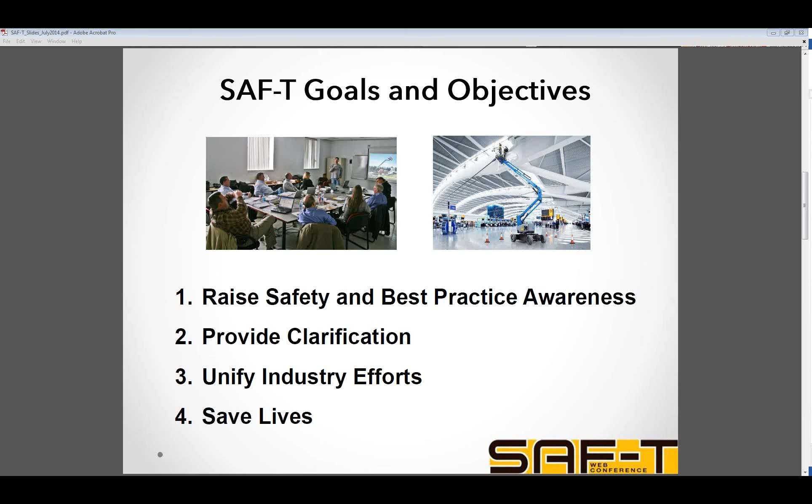Today's presenter is Scott Owyen, who will be discussing the top 10 safety tips for operating aerial work platforms. Scott Owyen joined Genie in 1983 and has held key positions in manufacturing, training, product management, and outside sales. Today, Scott serves as the Global Training Manager and focuses primarily on aerial work platform and telehandler operator safety training and product training. Scott was also instrumental in the development of the Genie Lift Pro online operator training program, which added online telehandler training to its product suite this week.

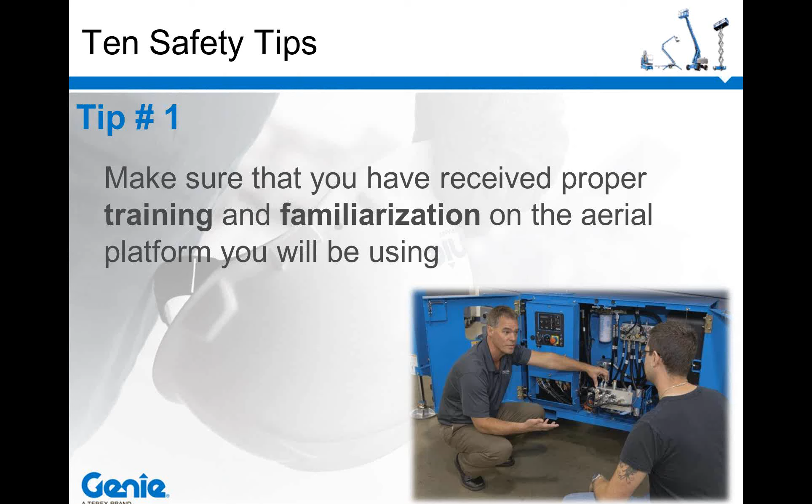The American National Standards Institute, or ANSI, is a standards writing body for aerial work platforms in the United States. ANSI has developed strictly defined training requirements for aerial work platforms. These requirements are outlined in their A92 Manual of Responsibilities that is sent with every machine shipped in the United States and Canada. ANSI requires two components of training: general training, which is typically done in a classroom or online and includes an overview of the responsibilities of all parties associated with the operation of aerial work platforms, standards and regulations, hazard recognition and avoidance, pre-operation inspections, function tests, workplace inspections, record keeping, and safe machine operation, among other topics.

And hands-on practical training, which includes locating the storage compartment for the operator's manual and the ANSI manual of responsibilities, reviewing the operator's manual and safety signs on the machine, performing a pre-operation inspection and function tests on the machine, demonstrating an understanding of the function and purpose of all safety devices, performing a workplace risk assessment, and finally, operating the machine for a sufficient period of time to demonstrate proficiency on the machine. Once you've been trained and qualified on a machine, you may be required to become familiar with and operate a different type of aerial work platform.

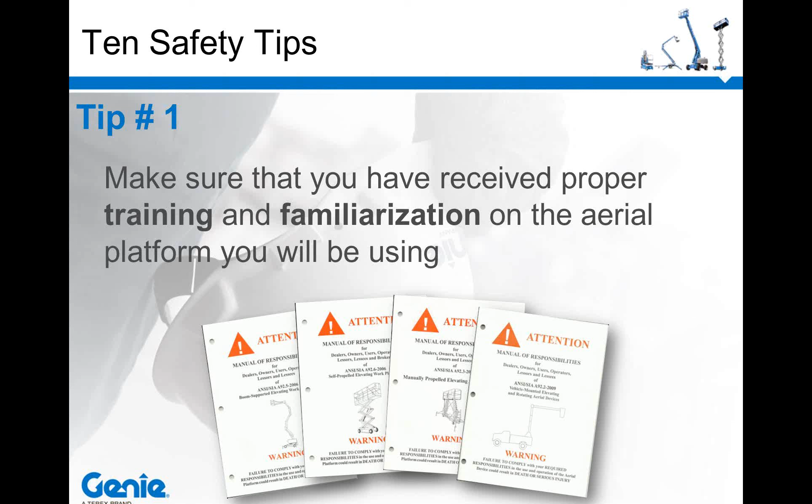Here's where it gets interesting. Although ANSI standards are voluntary, OSHA often adopts ANSI standards via incorporation by reference. When these standards are adopted or incorporated, they become part of the OSHA regulation, and therefore compliance is mandatory. Even when they are not incorporated into OSHA regulations, employers are expected to acknowledge them since they represent a consensus on what experts consider safe.

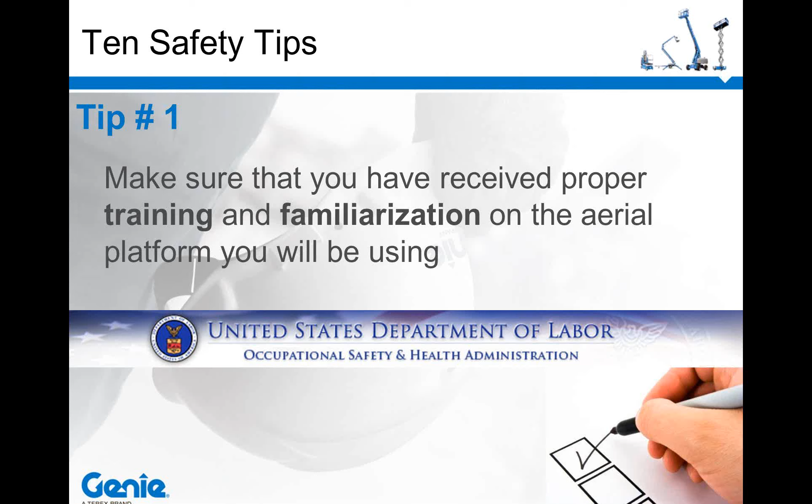Also, not following standards may be considered a violation of OSHA's General Duty Clause, which requires employers to keep the workplace free from recognized hazards. Finally, since ANSI standards are considered best practices, they are viewed as the legal standard of care. Noncompliance can equate to negligence and legal liability in the event of an injury. It's also important to note that you as an operator are personally liable for your actions when operating an aerial work platform. So there are many good reasons to ensure that you are properly trained.

Of course, the most important reason to make sure that you have received proper training and familiarization is to ensure that you have the knowledge and skills needed to operate the aerial work platform safely and efficiently. So please make sure that you have received proper training, both general training and hands-on practical training, as well as familiarization on the specific model of aerial work platform you will be using. Always thoroughly read the operator's manual before beginning operation. It contains all the safety information and operating instructions you will need to operate the machine safely and efficiently.

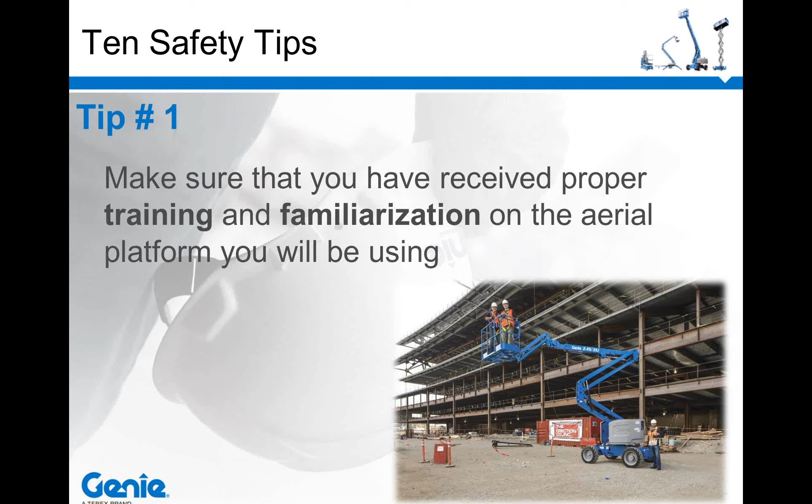Safety tip number 2. Since each job site may have additional requirements, it's important to always read, understand, and obey an employer's safety rules and worksite regulations, as well as all applicable local, governmental, and provincial regulations that apply to aerial work platform operation before operating the machine. Remember, the safe operation of any aerial work platform is up to you. It is your responsibility as an operator to inform your employer if there is even one thing that will keep you from safely doing your job.

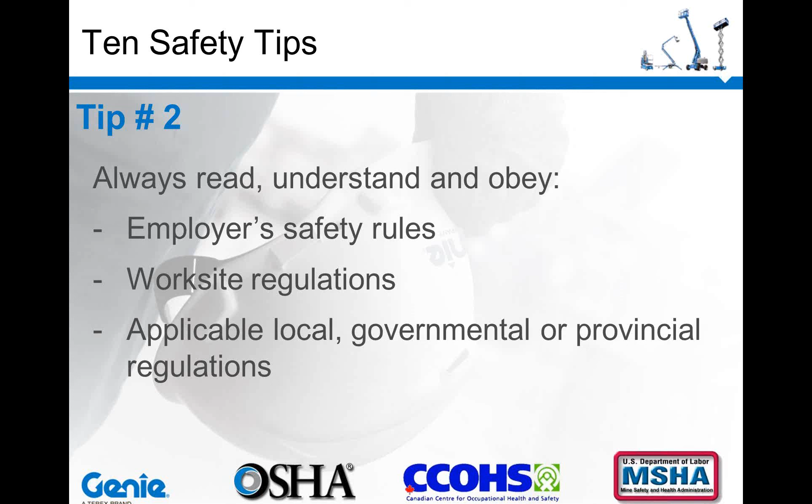Safety tip number 3. Always perform a pre-operation inspection and comprehensive function tests on the aerial work platform before each shift. The pre-operation inspection is a visual inspection performed by the operator prior to each work shift. This is important because very often you don't know where that machine has been or how it's been maintained. The inspection is designed to keep the operator out of harm's way by discovering if anything is apparently wrong with the machine before the operator performs the function tests.

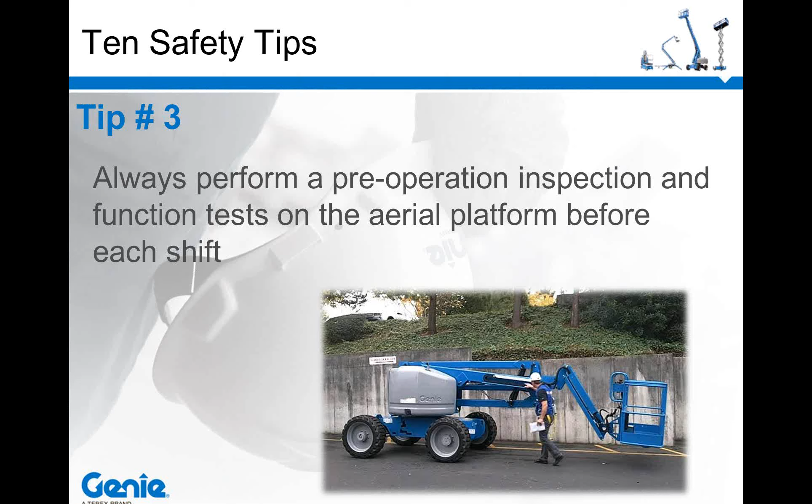The pre-operation inspection also serves to determine if routine maintenance procedures are required. Only routine maintenance items specified in the operator's manual may be performed by the operator, and only if they're authorized to do so by their employer. The operator's manual contains information about how to perform this inspection. You will need to check for unauthorized modifications, damage, or loose or missing parts.

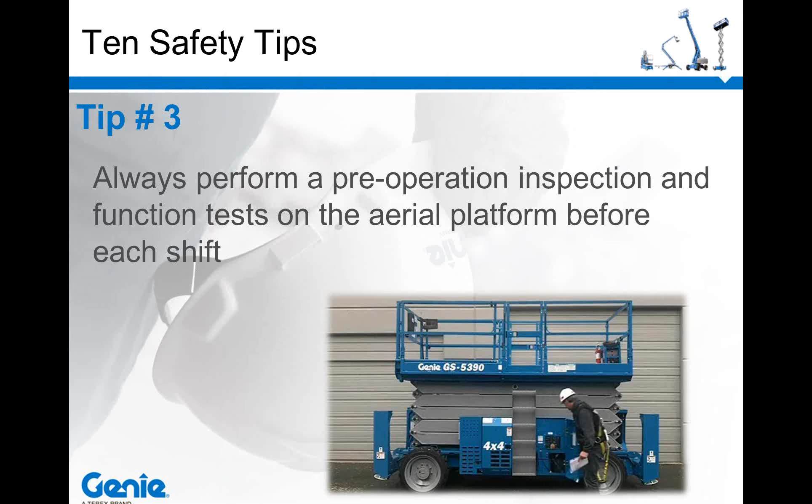If damage or any unauthorized variation from factory delivered condition is discovered, the aerial platform must be tagged and removed from service until it can be repaired by a qualified service technician according to the manufacturer's specifications. After repairs are completed, the operator must perform a pre-operation inspection again before going on to the function tests. Scheduled maintenance inspections should be performed by qualified service technicians according to the manufacturer's specifications and the requirements listed in the responsibilities manual. If the machine does check out, you're ready to move on to the function tests.

The function tests are designed to discover any malfunctions before the aerial platform is put into service and to verify that the machine is operating properly. A level sensor, alarm, or any other safety device can't do its job if it has been disabled or if it has malfunctioned. Before you begin testing functions, select an area that is firm, level, and free of ground and overhead obstructions. You must follow the step-by-step instructions in the operator's manual to test all functions, as well as the safety devices on the machine.

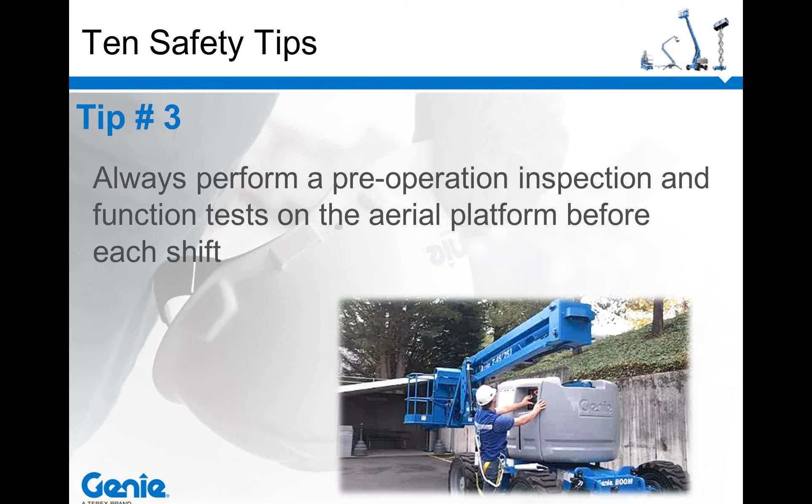A malfunctioning aerial platform must never be used. If malfunctions are discovered, the aerial platform must be tagged and removed from service until it can be repaired by a qualified service technician. After repairs are completed, you must perform a pre-operation inspection and function tests again before putting the machine back into service.

Safety tip number 4. Always perform a workplace risk assessment prior to moving the aerial work platform to the job site. The workplace inspection helps you determine if the workplace is suitable for safe machine operation. A properly performed workplace inspection identifies potential hazards associated with the work to be performed, assesses the level of risk involved, and defines the methods to control the potential hazards and reduce the risk. It also involves using the most appropriate aerial work platform for the work to be completed.

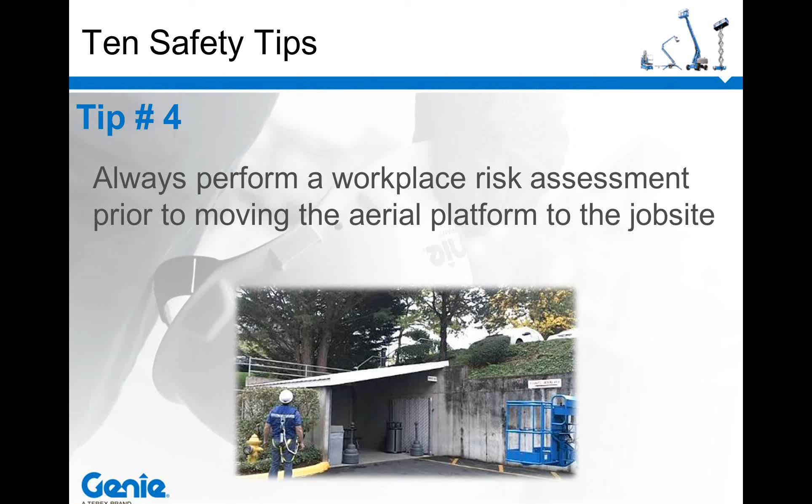When performing the workplace inspection, you should walk the job site, preferably in the path that the aerial work platform will travel. You will need to look for drop-offs and holes, floor obstructions, slopes, unstable or slippery surfaces, overhead obstacles, power lines, bad weather conditions, the presence of unauthorized personnel, and any other hazards that may exist. Then you must consciously think about and avoid those hazards through all phases of machine movement, setup, and operation. Don't take any chances. If you discover any situation that poses a hazard, it is your responsibility to stop work and report it to your employer.

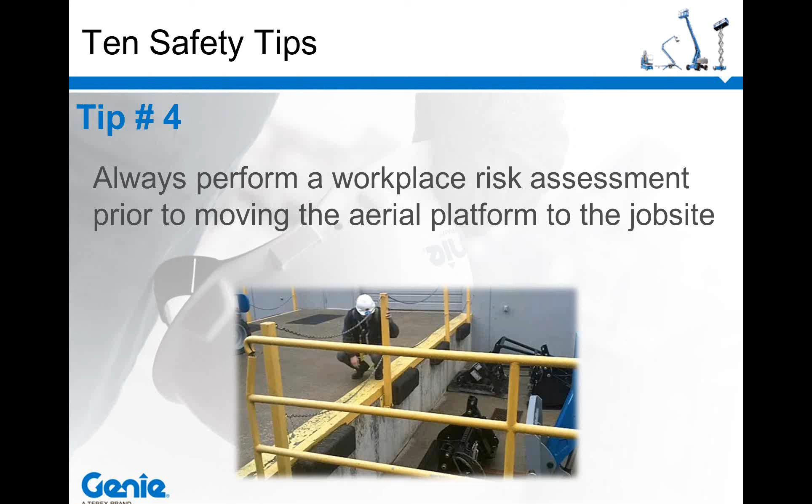A list of hazards you need to be aware of can be found in the operator's manual for the machine that you are operating. There may be others, so you must be alert and use your best judgment and experience to take the necessary precautions to avoid these hazards and any others that may exist. You must constantly assess the job variables and avoid exceeding the machine's or your own capabilities for the terrain and job site conditions.

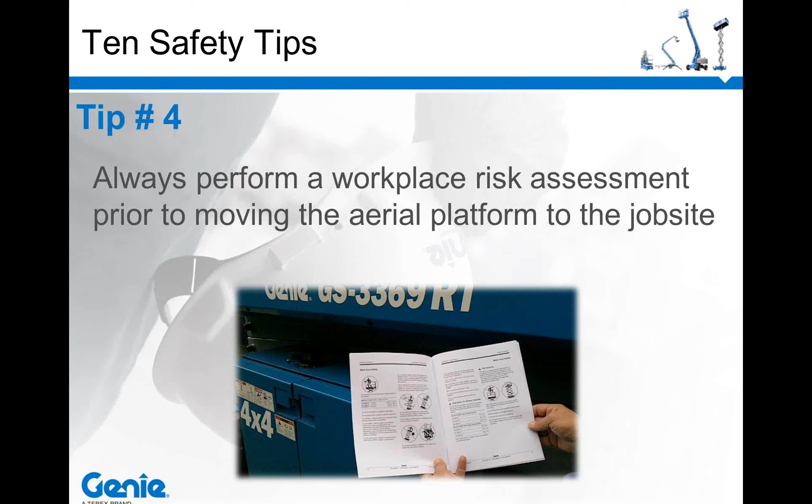Safety tip number 5. Always wear the proper personal fall protection when operating or occupying either a telescopic or articulating boom. A properly fitted full-body harness and appropriate lanyard or self-retracting lifeline are required by Genie as well as national standards and regulations. The purpose of the harness and lanyard is to protect an operator or passenger from falling to a lower level if ejected from the platform while traveling or if the machine is struck by another vehicle or object. Wearing the proper personal fall protection may reduce the chances of a fall resulting in serious injury or even death.

All personal fall protection equipment, or PFPE, must comply with applicable governmental regulations and must be inspected and used in accordance with PFPE manufacturer's instructions. Never operate a boom without this equipment.

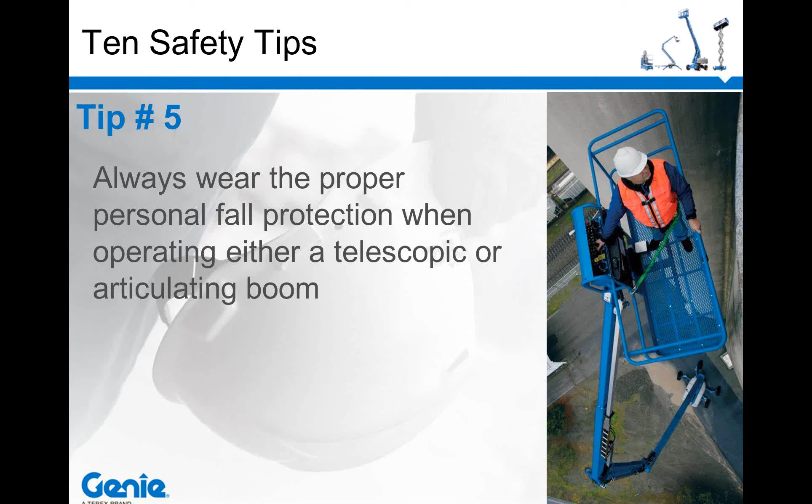Safety tip number 6, and this is actually one of the most important steps in this whole set of slides. Never sit, stand, or climb on the platform guardrails for any reason. According to the International Powered Access Federation Accident Database, of the 53 reported fatalities involving aerial work platforms in 2013, 13 were caused by falling from the platform.

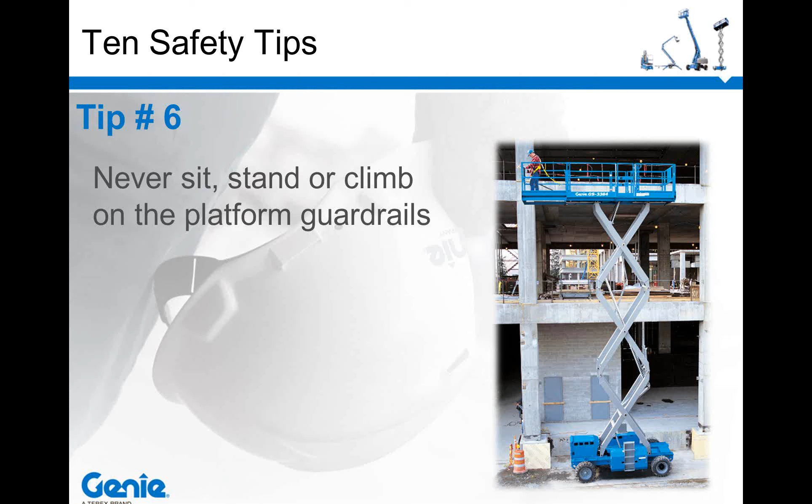The guardrails on an aerial work platform provide fall protection only if the operator maintains a firm footing on the platform floor at all times. Never place ladders, scaffolding, or any other elevating structure inside or against the platform. If an operator is required to reach an overhead work area that is too small for the platform guardrails to allow access to, the use of a manufacturer-approved device that has been specifically designed to provide additional access to confined spaces is recommended.

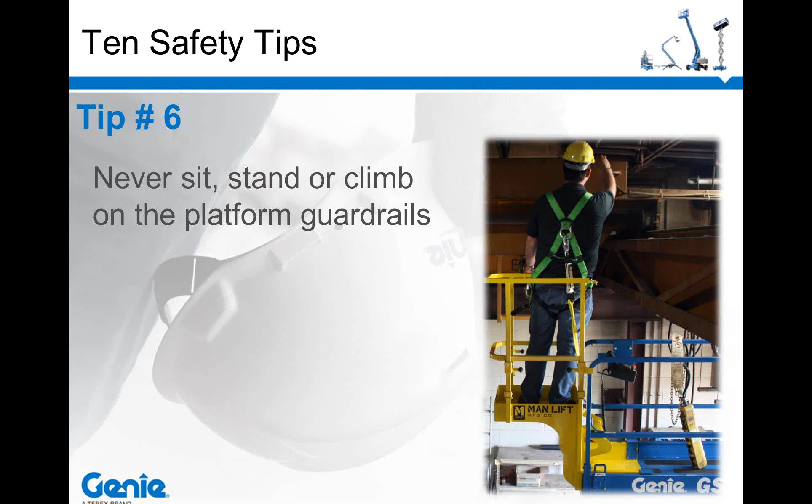Safety tip number 7. Never exit an elevated boom or scissor platform unless you've been properly trained to do so, maintain 100% tie-off at all times, and are in possession of and follow all of the instructions provided in an approval letter from the manufacturer that provides the proper guidance. Always contact the manufacturer of the aerial work platform you are using for additional information on exiting an aerial platform.

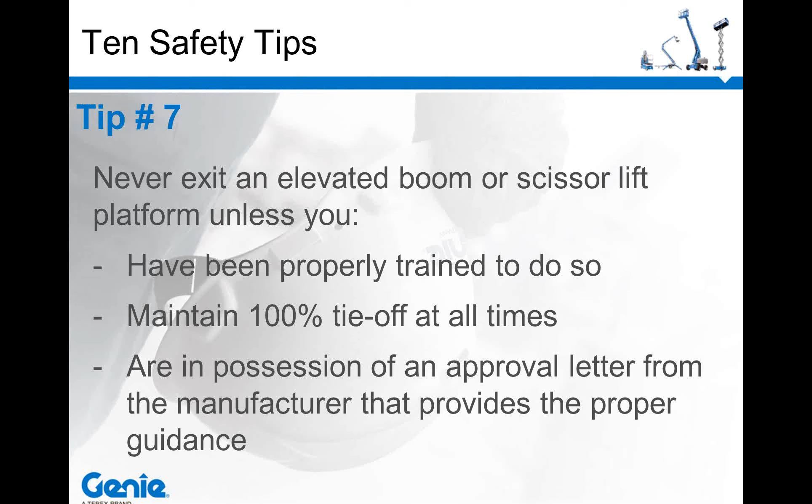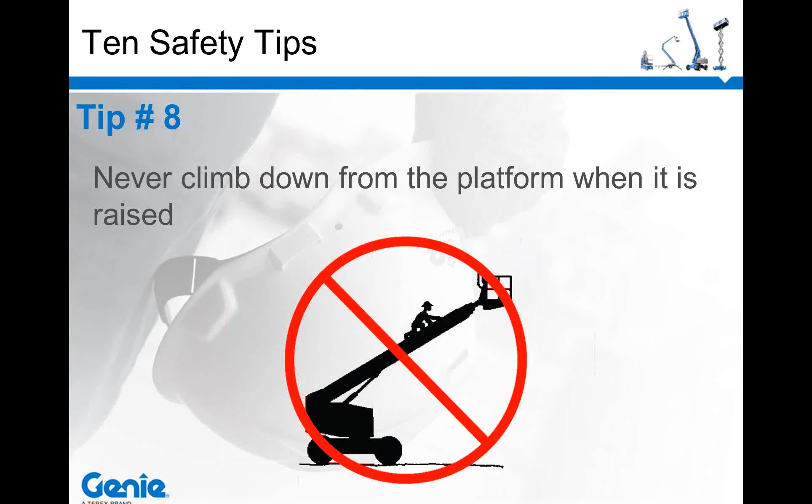Safety tip number 8. Never climb down from the platform when it is raised. Whenever possible, keep a cell phone or a two-way radio with you while you are in the platform. Always have a rescue plan in place. Rescue plans should, at a minimum, include steps to ensure that other personnel are aware that you are operating the aerial work platform and that they have been trained and familiarized to operate the machine from the ground controls, including the use of the ground control override function if equipped.

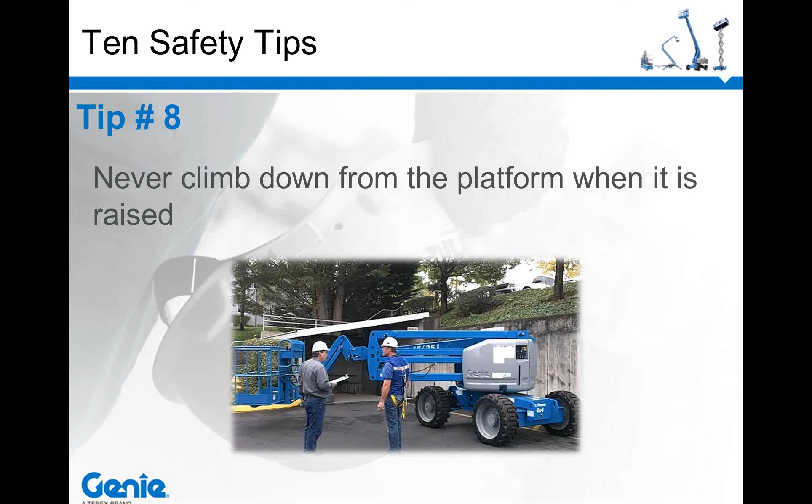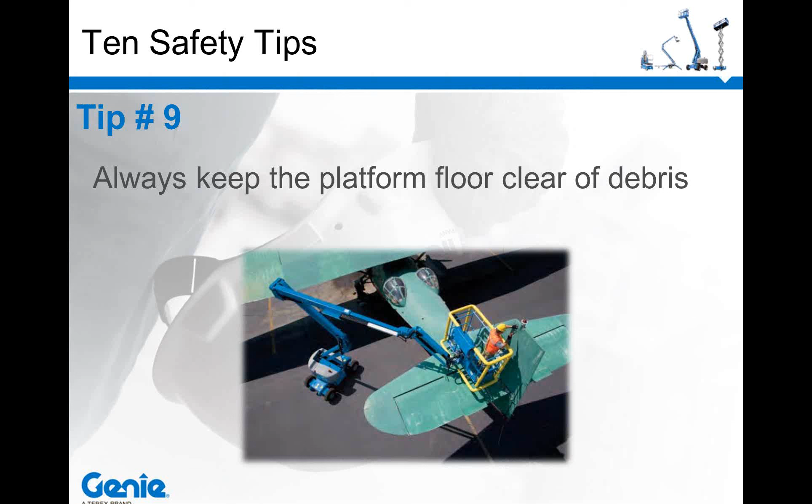Safety tip number 9. Always keep the platform floor clear of debris. Scrap materials, buckets, large toolboxes, and other items can cause a serious tripping hazard. You should remove any item from the platform that is not absolutely necessary to do your work. Utilize special manufacturer-approved attachments, such as fluorescent tube caddies, pipe cradles, or panel cradles, whenever possible to lift large or bulky items. Only use attachments that have been approved by the aerial work platform manufacturer for the specific machine you are using.

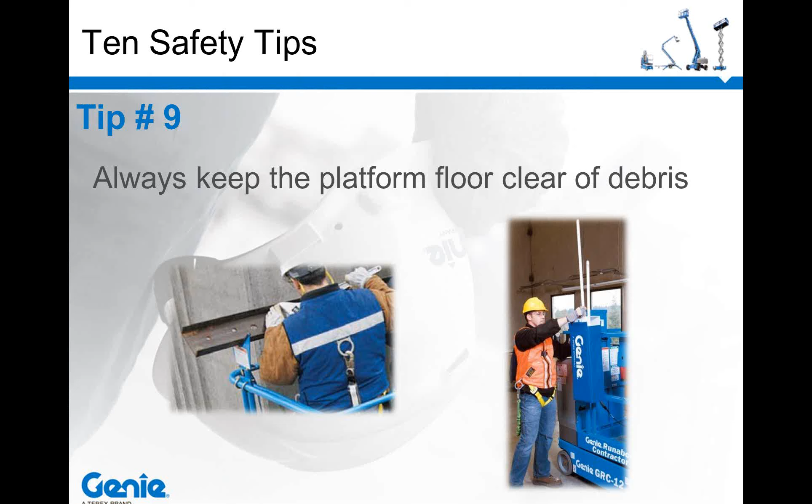And finally, safety tip number 10. Always lower the platform entry mid-rail or close the entry gate before operating the aerial work platform. The entry mid-rail or gate is an integral part of the platform guardrail and plays a critical role in fall protection. Never tape or prop the entry open, and never use an aerial work platform if the gate does not properly latch.

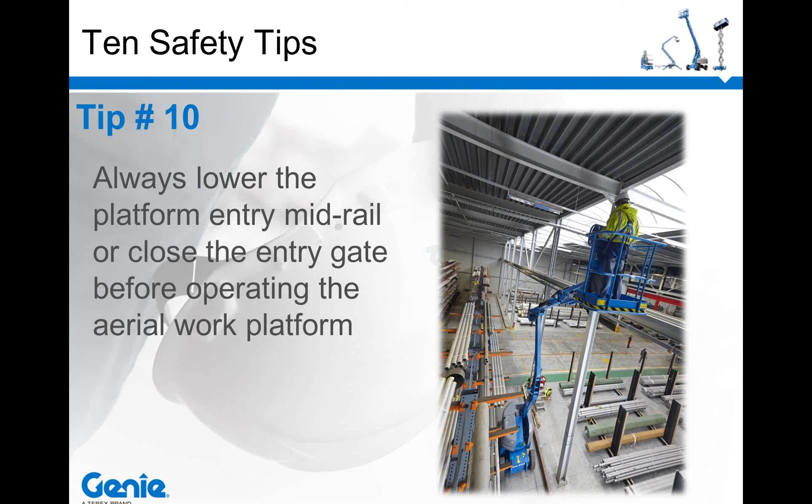The operation of any aerial work platform is subject to certain hazards that can be protected against only by the exercise of intelligence, care, and common sense, and not by mechanical means. It is essential that the operation, maintenance, and service of aerial work platforms is performed only by competent, careful people trained in the intended use, safe operation, maintenance, and service of this type of equipment. Remember, if you don't follow all safety instructions and safe operating procedures, serious injury or even death could occur. So please, always follow the instructions that the manufacturers have set out for both safety rules and operating instructions.